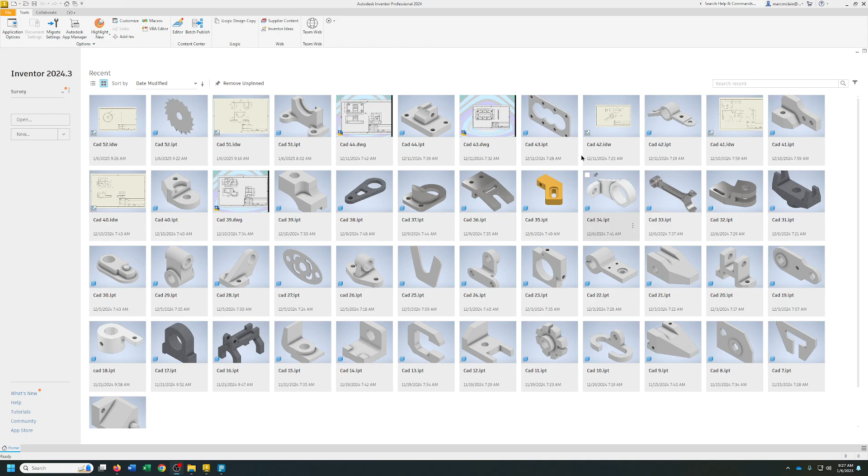We're back for CAD 53, and this one is the Geneva wheel. All right, and it is inches. So go ahead and create that. Now, this one's going to work very similar to the one we just did. Okay, it's going to be a lot like CAD 52.

All right, we're going to just start on the front. Now, we're going to do the big part. So, we got a couple of circles we got to draw. Now, we're going to go ahead and do the first circle. Now, it's not going to be the radius of 4.5. It's going to be the radius of 4 that we're going to do first. So I'm going to do a radius of 4. That's diameter. So let's go 8. Diameter of 8.

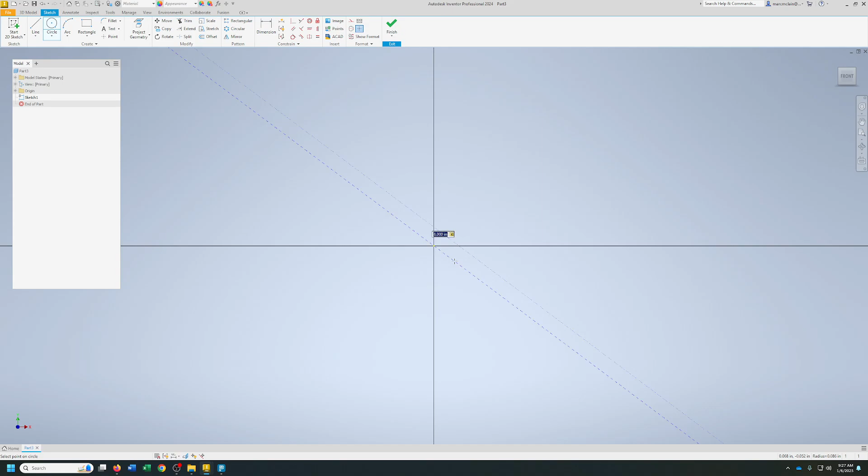Now, we need to come out here a little bit. So what I'm going to do is I'm just going to do an arc. Center point. And I'm going to come out here. And you see the radius down there at the bottom? 4.5. And then I'm just going to draw a little bit of a line. And that's it. Now, that's where I'm going to put the circle that makes this cut.

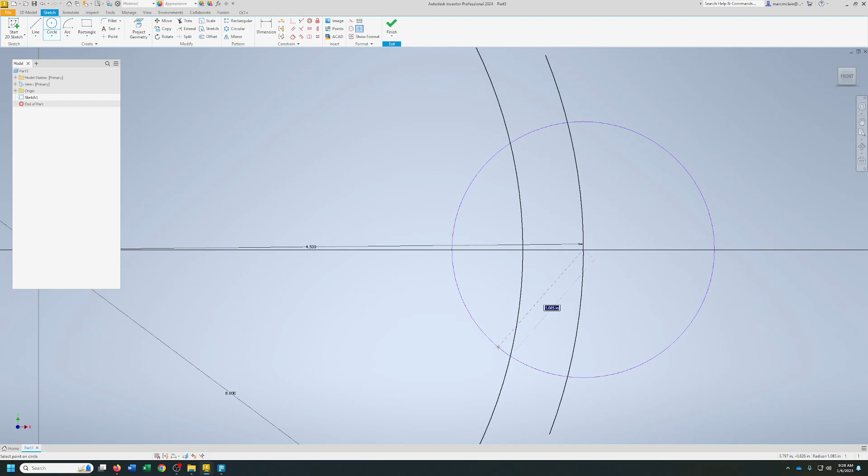So let's go ahead and do that circle. And it's going to be right there. Let me zoom in. Right there. Now, we're on diameters. And it's going to be a radius of 1.5. So we're going to right click, go to radius, and then 1.5. And that's got that one.

Now, we've got another one, and I'm just going to go ahead and get the circle for that. Now, I'm going to put this on this one right here, center line. Same center. And this one's going to be a diameter of 4.5. So we go back, diameter 4.5. Now, I've got a circle here, and that one's going to be a diameter of 0.75.

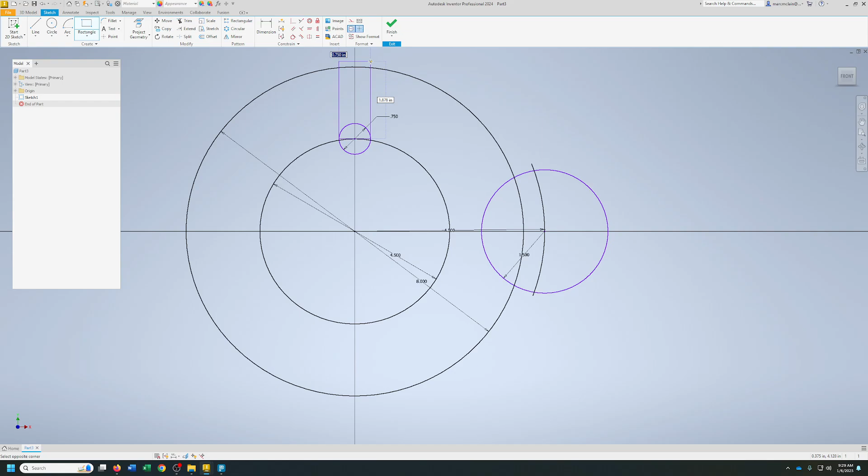And then I'm going to do a rectangle, because, you know, I like rectangles. Both sides of the circle. And there we go. See how it made it? I forgot to change that. So I'll just grab all of this and turn that off. Okay, so now we got that. Now I can trim out the inside of this. I'm going to take that one and make it. And it doesn't show up as dashed, but it is dashed.

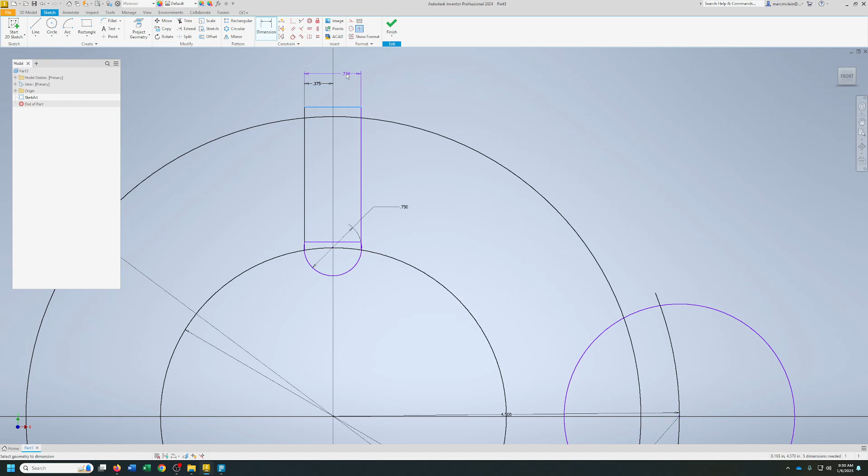Extend those two down. Aha. There we go. Now we're evened up. Now I can go ahead and trim. Take that out of the center. All right, now trim this and this and this. All right, so there's our two cuts, right?

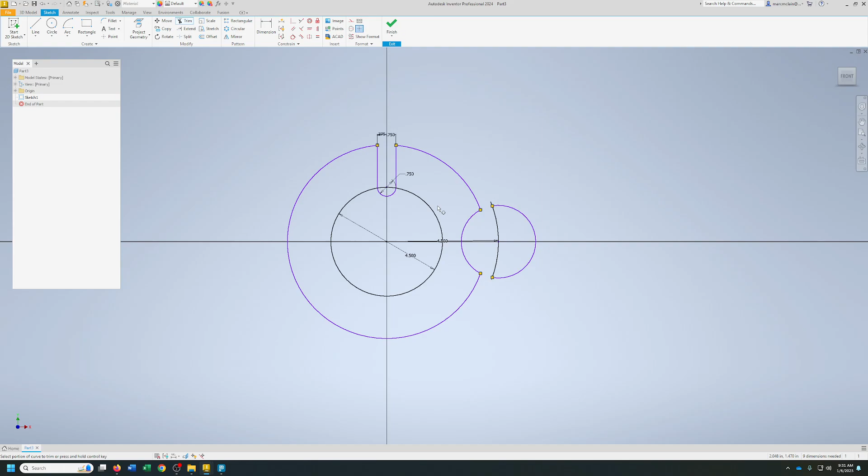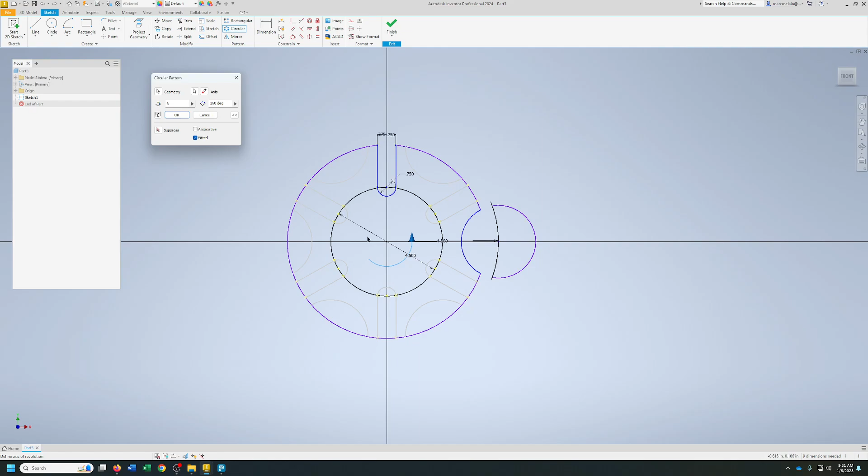Now there are 6 of these, so we will... Whoop. Let me undo that. Apparently I was still in trim. Here we go. Grab that one and that one. There we go. And we'll do another circular pattern. Remember to uncheck associative, axis, and we'll pick here. And 6 is what we want, so we'll hit OK, and there we go. All right, so there's our thing.

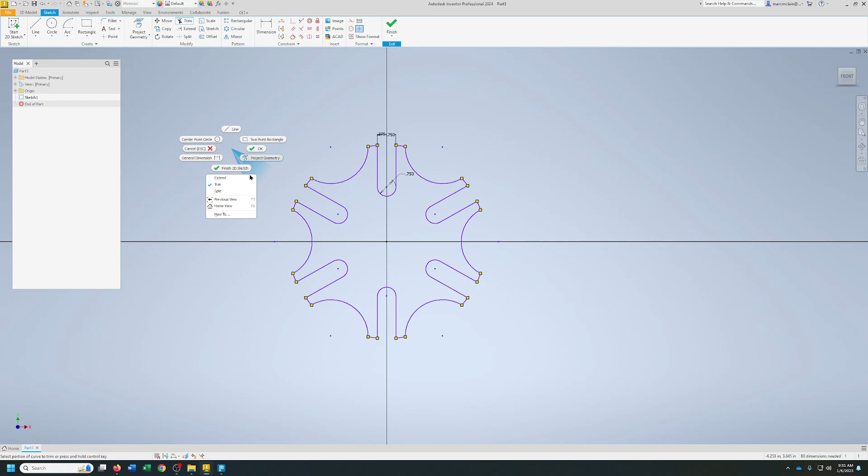Now, we're going to delete this. And then we're going to take this out, and then we'll trim. And it's easy. And there's our circular pattern. Now, I'm going to right click and hit OK. Then I'm going to right click again and come in here to Sketch Doctor. So we're going to diagnose our sketch.

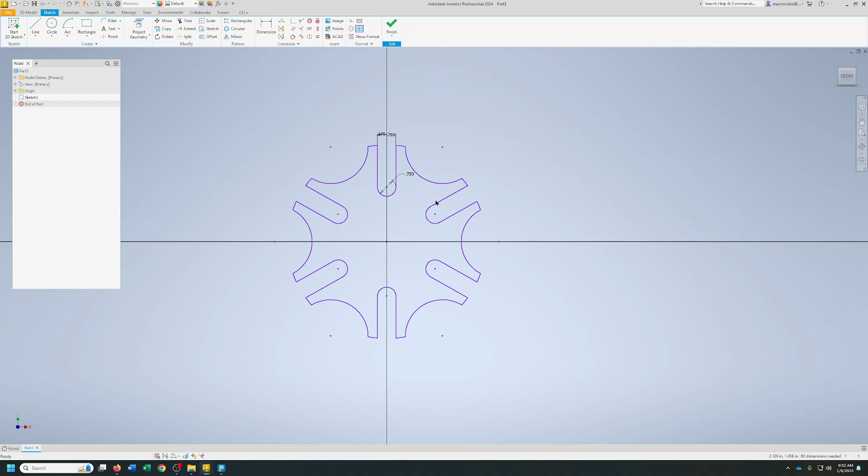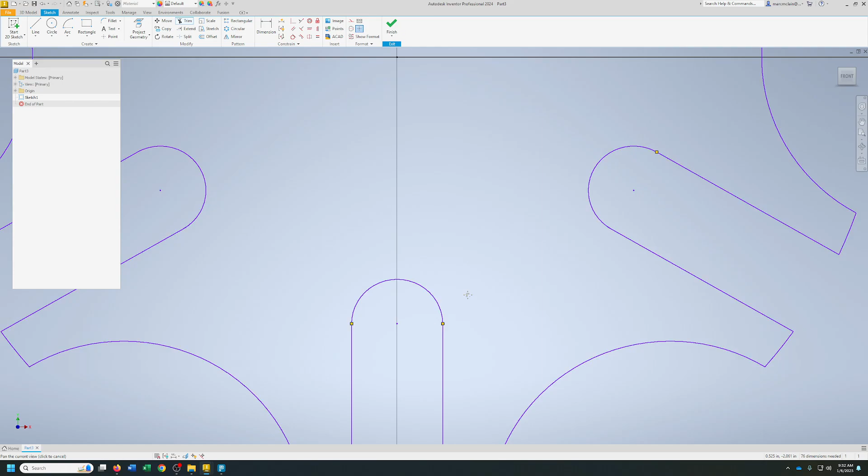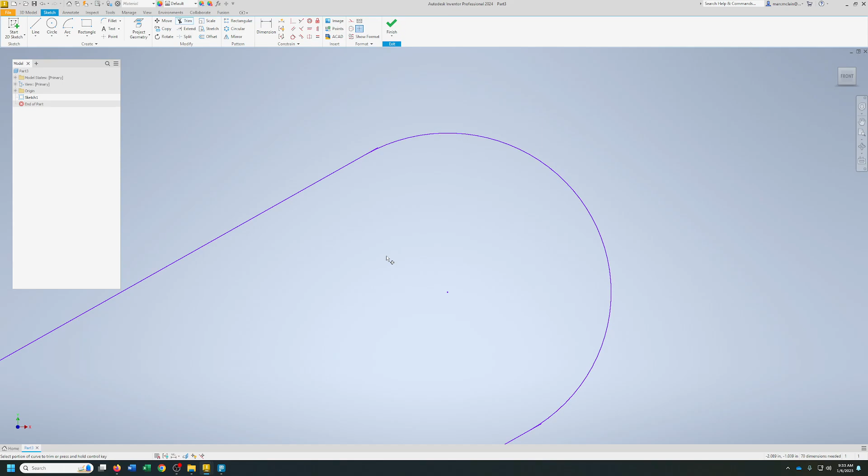And these are the tests. There's 5 of them. All right, we got open loops everywhere. So next, open loop found in the profile, use close loop or edit. So we'll hit edit, and we'll get an edit sketch. Now, let's go look. It's a line. See? So we'll trim that line. Zoom in and get them. Looks like both sides. Then it'll yellow dot it so you can tell where you've been.

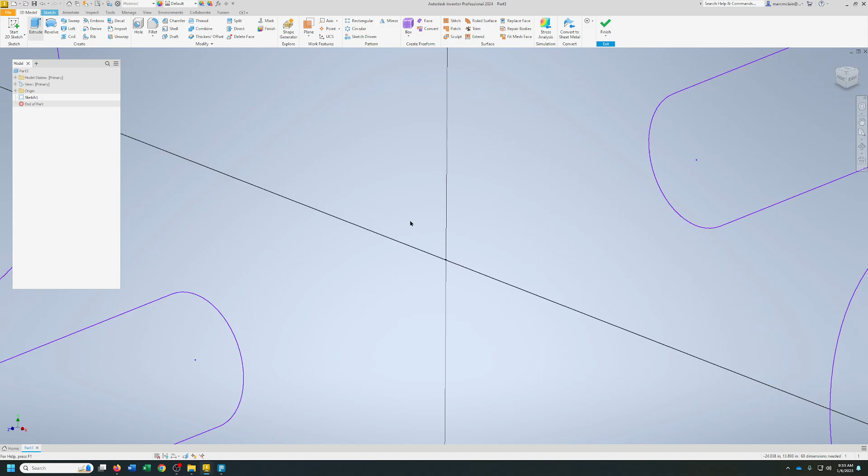So let's see. Hit OK. Let's do another Sketch Doctor, see if we have anything left. All tests completed successfully, no problems found, everything should be good. So we'll hit OK, cancel on that. Go ahead and do our 3D model extrude. And what's our distance? 0.5.

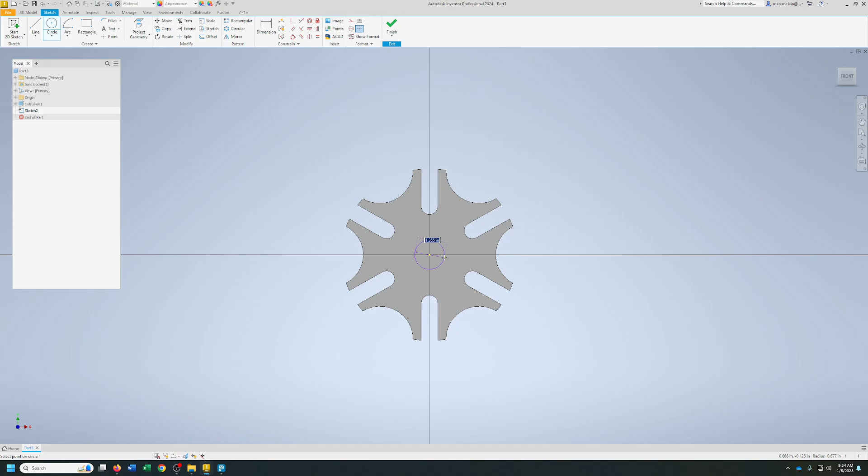All right, so there's that first part. Now, we're going to get on the front of it. We'll zoom in. We got to get the hub in the middle, okay? So that hub is going to be a diameter of 2.5. So we'll just do a circle right in the center, diameter 2.5, and then 3D model, extrude, and it's also a 1/2 inch. So we'll leave that set.

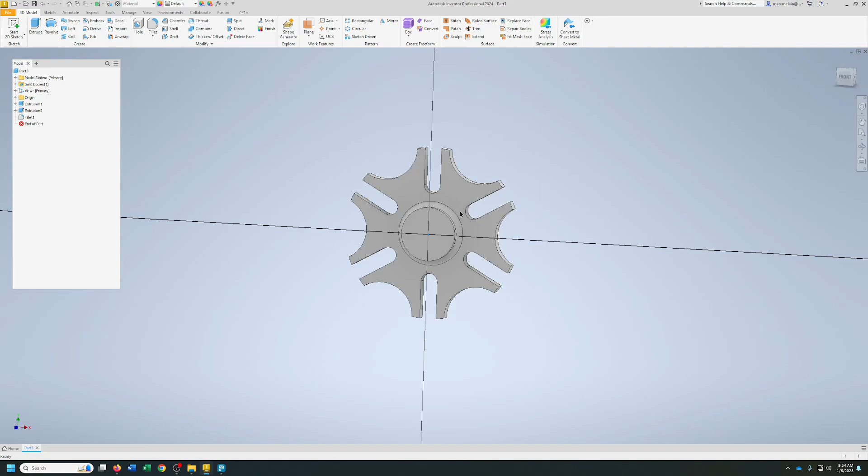There we go. Now we've got a fillet that goes around this, so we just say fillet, and the fillet size is 0.25. We'll hit OK. All right, so all that's left now is our keyway. And we'll just draw that circle. And it is a diameter of 1.5. And then we got our keyway on the top, like so.

All right, now zoom in. Dimension. This part is supposed to be 0.36. So don't forget to center it. 0.36 divided by 2 if you don't feel like doing the math, let the computer do it for you. And then we will trim here, here, and here. And then we get this one. 0.2.

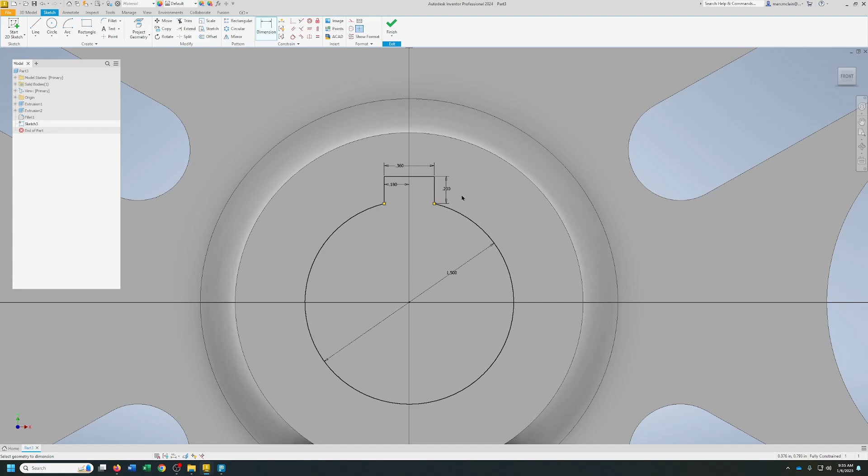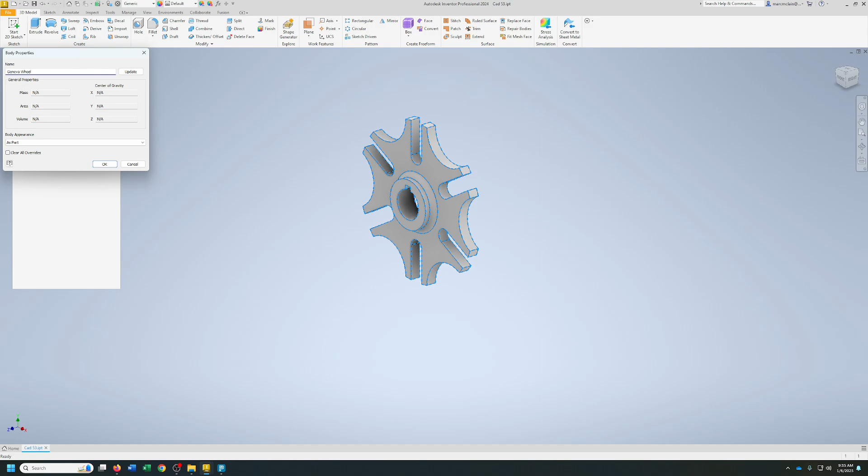And there's your keyway. Finish that and extrude it. And of course cut through all and hit OK. And there you go. All right, so we'll go ahead and save this as CAD 53. Geneva wheel and update. So we hit all the numbers and hit OK. All right. So we're done. All right.

Now we can go to this layout. And we're just going to do 2 views on this one. Once again, change our sheet size to B. And do our base view. We'll move it over a little bit and we'll get our side view. And there we go. All right, now we got to get centers in all of these.

So let's go to annotate and we'll do the center of this and then around. So I'm going to use this one, okay? Center pattern. Click that. I'll pick this first. Now pick this and this. See how it does? Then I'll go back and pick the first one again and then hit create. All right, so that's got those. And you can stretch these out if you need to.

Now we need to get one on that one. Let's see if it'll do it. No, okay. So what we'll do is we'll just grab this one, pull it out that way, pull it out that way. And once again, you can do that with the middle ones if you want. And then you've got everything ready to go. All right, so now it's time to dimension.

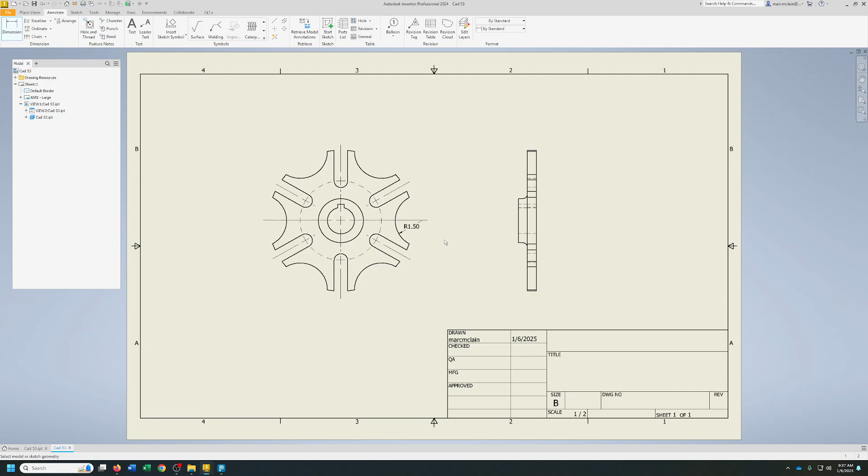So I'll just pick this one, see, and that gives me the spot. Dimension type on this one will be diameter. And that gives me the angle. But that's not the angle I want. I want this angle. It's fighting me today. Okay, let's try this again. Don't pick the dot. There we go. We got our 60 degrees.

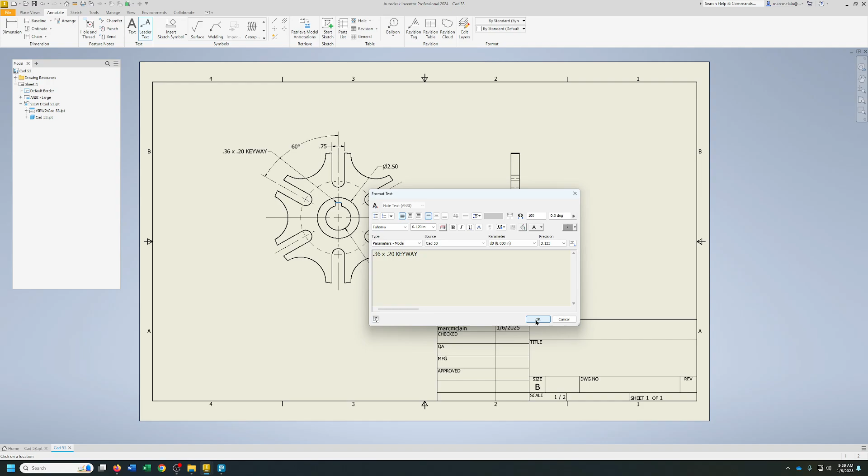Now we gotta get our keyway. Don't forget to use leader text. And zoom in and get a spot. There we go. We'll come out here. Continue. 0.36 by 0.20. Keyway, once again, all caps, don't forget. All right, so we got this, we got that, we got this, we got this. Okay.

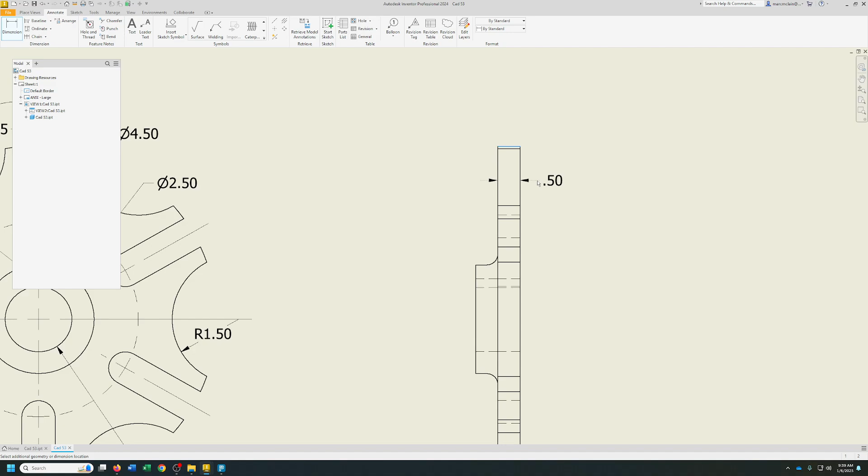Now, they're showing a diameter on the other side, so I'm thinking we'll try it. Let's see how it does. So, what I usually do is I'll just use one of these, okay? Just hit dimension and then pick. Try not to hit a dot, so you may have to zoom in. Bring it out, right click, change your dimension type to diameter. Okay, now you can put that anywhere on that circle you want to. And there you go. Okay?

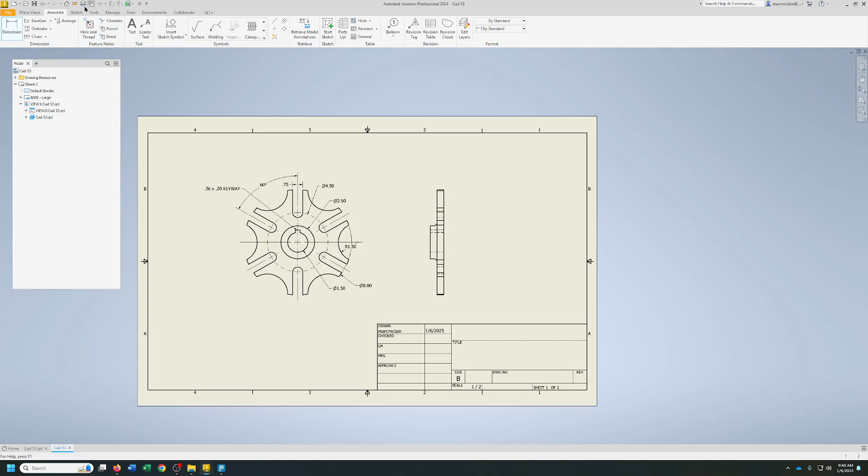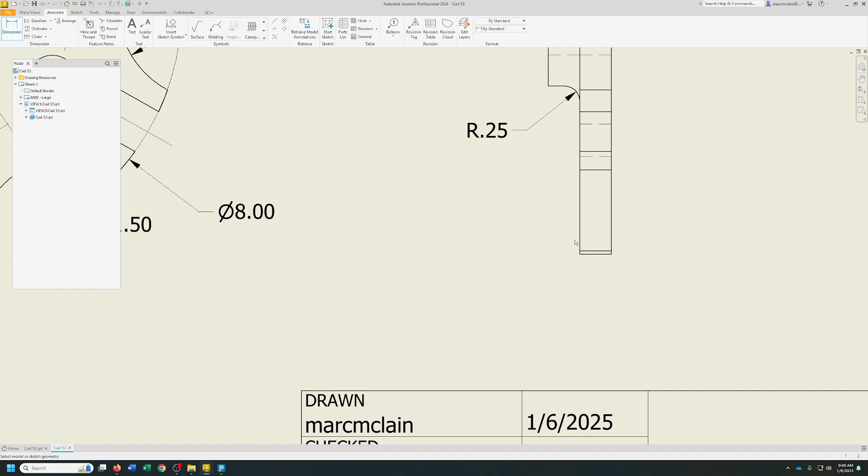Now the only dimensions we need on this one is we need one here and one here. They show it bottom and top, but that's just not the way I do things. I like to keep all my stuff kind of neat and on one side when I'm doing these. All right, now the only thing we got left to do is our fillet. And there's that. And we'll put this one right about there. Okay, so that's got everything.

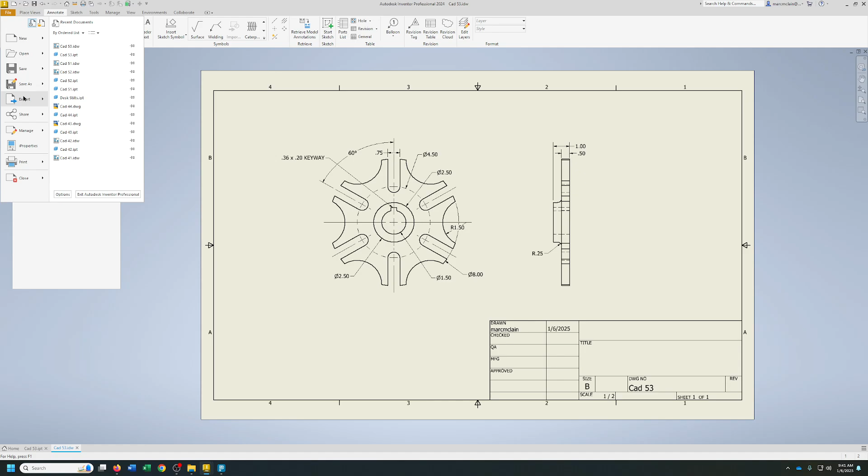All right, so we're going to save that. CAD 53, and that's going to put our CAD 53 down there, and then don't forget to export it, okay, as a PDF, and it'll have the same CAD 53 number. Save that off, and we're done, and we'll see you for CAD 54.